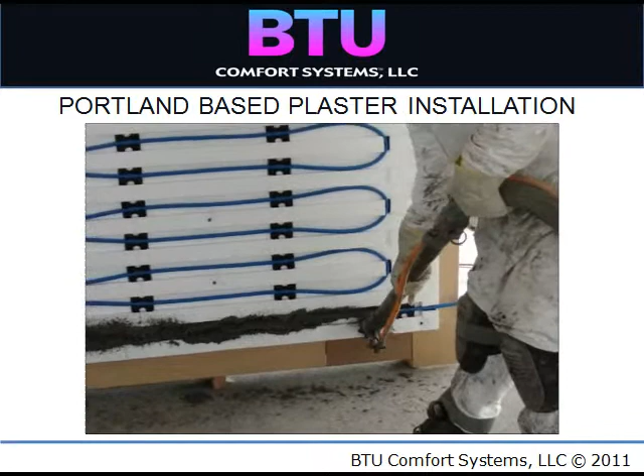Later in the ceiling application, his boss takes over, who again has never attempted to do this, and he completes the ceiling panel embedding. Again, little material falls to the floor. What did fall occurs due to air pressure at the dispensing nozzle being set a bit too high.

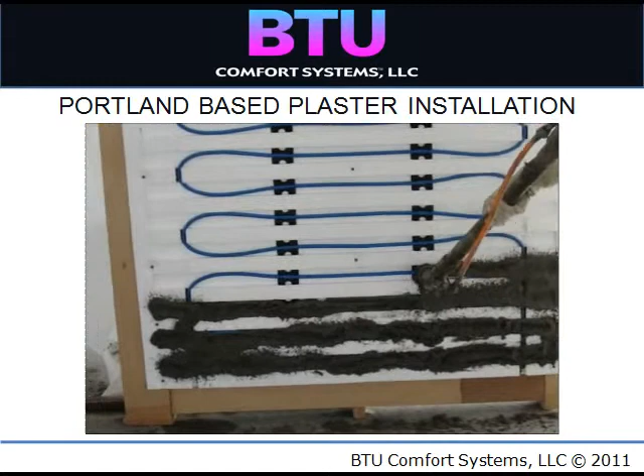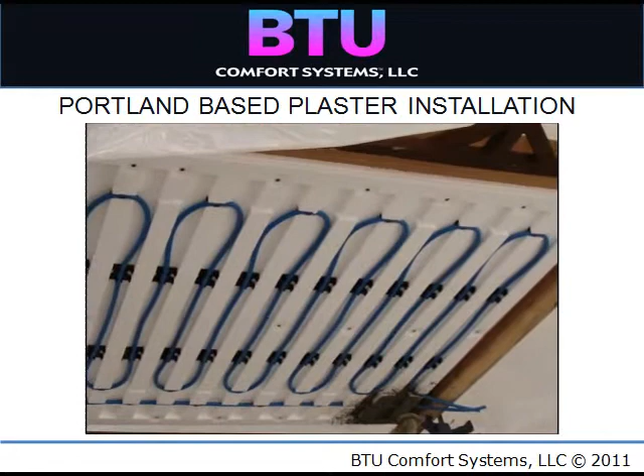Material properties are such that adhesion is a natural trait of the design mix. Within minutes of application, the finish coat was applied to the wall surface, and the ceiling was troweled and sponge-coated to its finished texture. Application pumps such as these can apply upwards of 1,400 square feet per hour. Mixing of the transfer material batches becomes the key to rapid application.

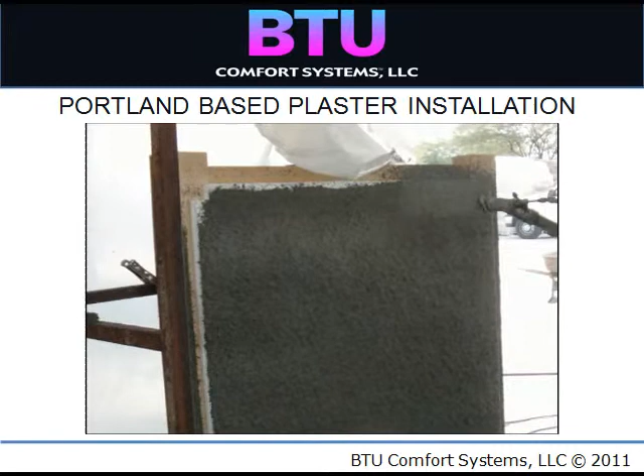Good for exterior. Yeah, exactly.

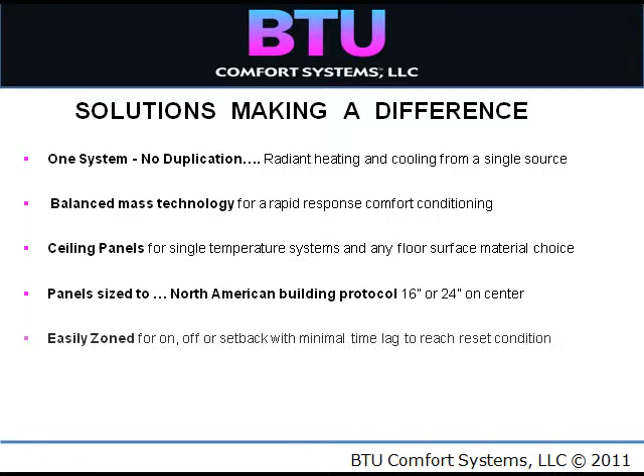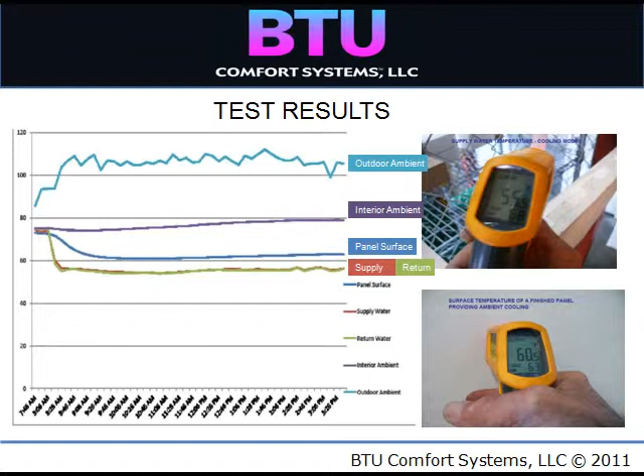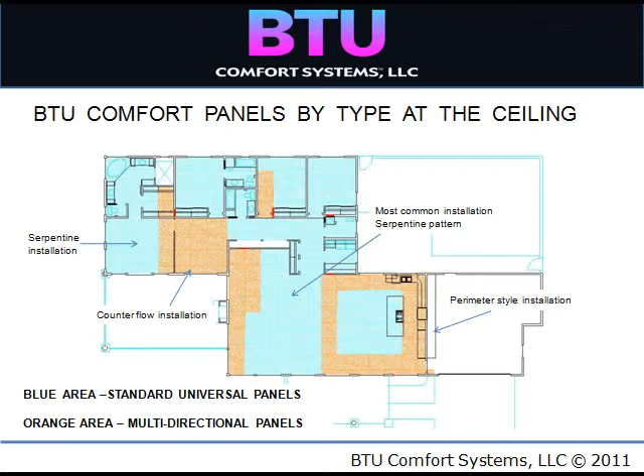Depicted here is a color schematic of panels at the ceiling of a typical new construction home for radiant heating and cooling. The blue panels represent the standard universal panels with a mix of 4 to 8 inch on-center tubing. The orange area represents the multi-directional panels, again with similar on-center spacing.

Here we see the individual circuits overlaid on the colored areas. The lower right-hand corner depicts a 4-inch on-center banding of tubing in multi-directional panels. The light blue area depicts an 8-inch on-center placed in standard universal panels.

The room directly to the left is laid out in a very typical radiant serpentine pattern at 4 inches on-center. As we move upward in that room, you will see the tubing spacing change to 8 inches on-center. Just to the left, the all-solid orange area is a 4-inch on-center multi-directional panel in a counterflow pattern.

Towards the top of the plan, there are areas above the tubs and showers where the tubing is left out. System controls provide for the monitoring of dew point in any given zone and will shut off the supply water if dew point is approached.

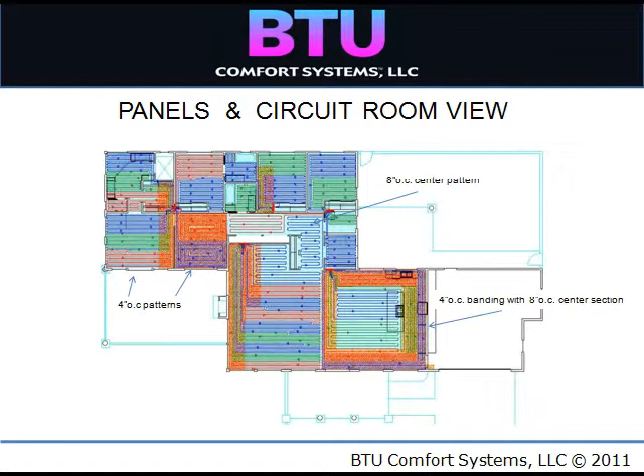Once past dew point and a call for conditioning still exists, then the system will once again flow the supply water. The system for radiant heating and cooling need be no more complicated than the above layout.

This is the system I've used for the past 2.5 years in my warehouse. Simple, straightforward, and it completely does the job of comfort conditioning.

Even though we hit temperatures that go well below 25 degrees, I opted not to use a boiler backup. The optional air handler was installed. I use a 1.5-ton hydronic coil high velocity Unico system to keep my air fresh and filtered.